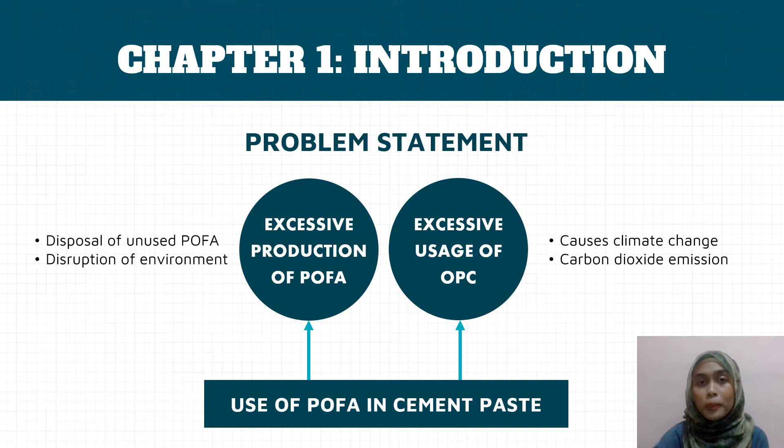In this research, there are 3 objectives that have been focused on, which are to establish the properties of fresh cement paste due to the partial replacement of OPC by POFA. Secondly, to determine the compressive strength of cement paste incorporating various percentages of POFA as partial replacement of OPC, and thirdly, to analyze the water absorption properties of cement paste with OPC replaced by POFA.

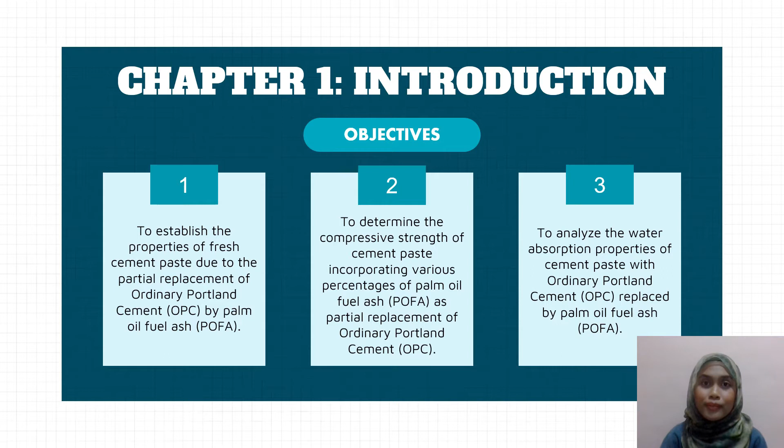POFA is a waste that has been generated from palm oil production. Also, POFA can be recycled and it can be used as partial replacement of OPC. This is because POFA contains pozzolanic materials as it has a fine structure and it contains silica or alumina.

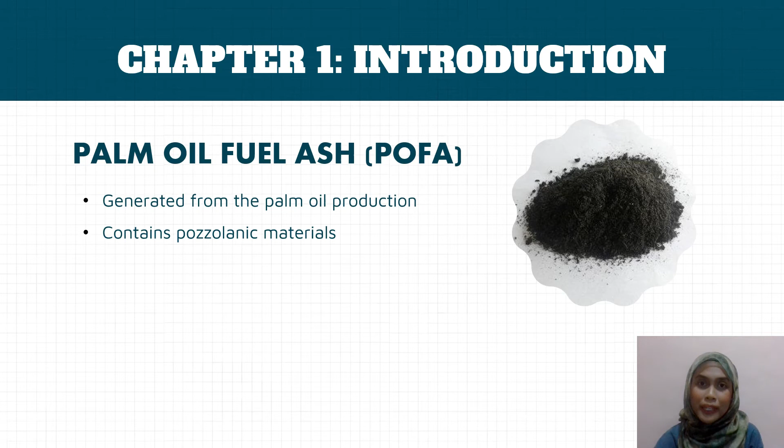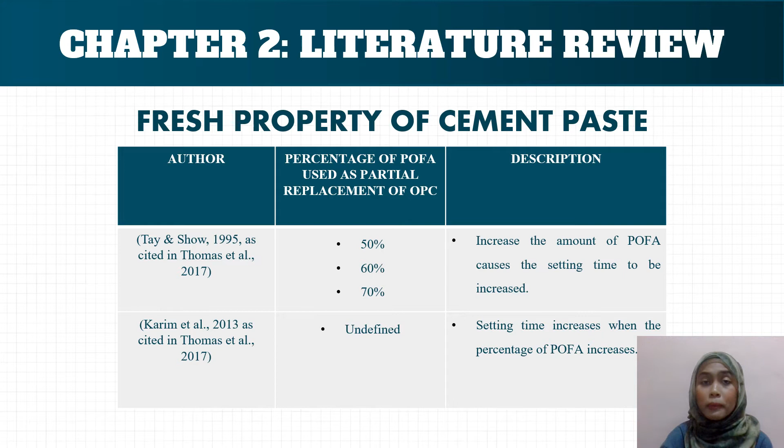Moving on to the next chapter, which is the literature review. For the fresh property of cement paste, these 2 authors have concluded that the setting time will be increased as the percentage of POFA increases. Next, for the hardened property of cement paste, these 2 authors have reported that the compressive strength will be reduced as the percentage of POFA added into the mixture increases.

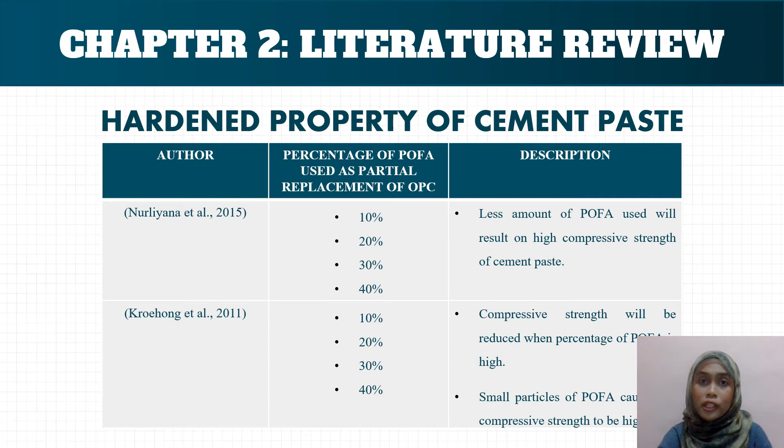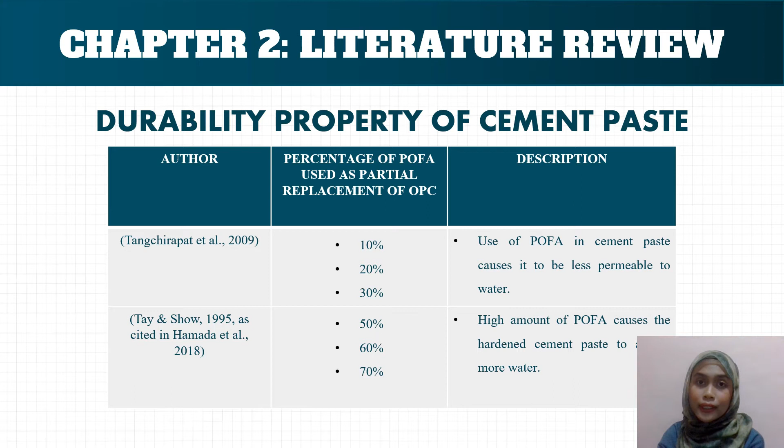Lastly, for the durability property of cement paste, these 2 authors have mentioned that the usage of POFA in a cement paste mixture will cause the cement paste to be less permeable to water. Chapter 3 explains the methodology used in this research.

There are 4 types of cement paste that have different percentages of POFA, which are 0, 5, 15, and 25% of POFA. The cement paste that has 0% of POFA is considered as the conventional cement paste, while the remaining cement paste is considered as improvised cement paste. There are 3 materials needed to produce the cement paste, which are the cement, OPC, POFA, and also water.

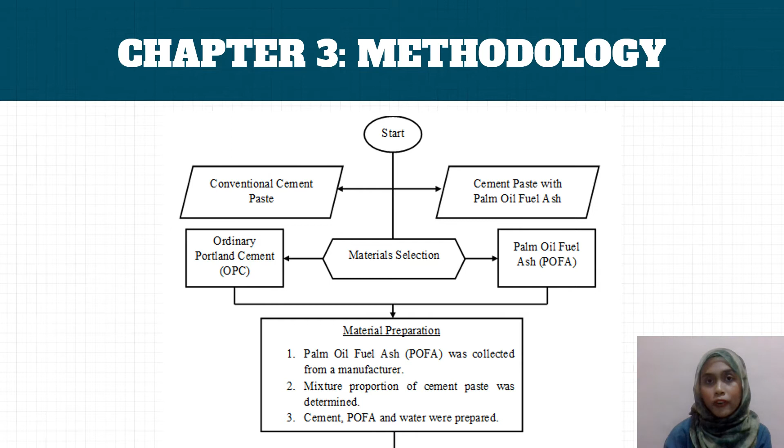The mixture proportion of cement paste was determined according to the correlation of water to cement ratio, and the water to cement ratio used in this project is 0.5. And then the materials were weighed according to the weight that has been calculated from the mix design. Next, all materials were mixed by using the mortar mixing machine, and then the fresh cement paste will be tested on its workability by conducting setting time tests.

Setting time consists of 2, which are the initial setting time and final setting time. Initial setting time is the time taken for the cement paste to start to harden. Meanwhile, the final setting time is defined as the time taken when the needle failed to penetrate the surface of the cement paste. After that, the fresh cement paste was put into the water curing tank for the curing process. The water curing method is used to help retain the moisture in the hardened cement paste for development of compressive strength of the cement paste.

When the cement paste has hardened, there were 2 tests that have been conducted, which are the compression test and water absorption test. Both tests were conducted at 7, 14, and 28 days of curing. The compression test was conducted by using the digital compression testing machine, and it was conducted at 3 different ages of curing to observe the development of compressive strength of the cement paste.

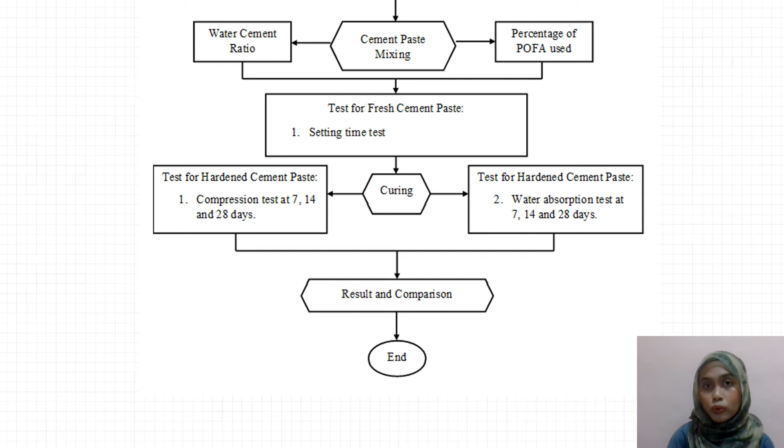And for the water absorption test, the samples were taken out from the water curing tank and put into the oven for the oven drying process 2 days before the test was conducted. After it is oven dried, the weight of the sample will be recorded. Also, after oven drying, the sample will be immersed in water for 30 minutes, and then the weight will be recorded too. The percentage of water absorption will be calculated through those two weights of the sample.

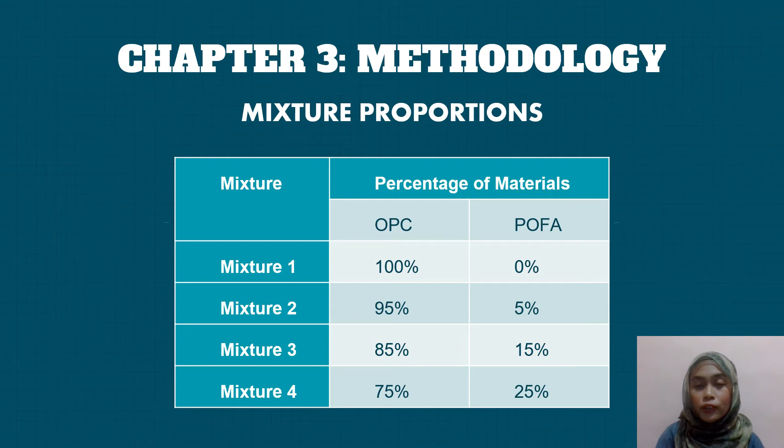The table shown in the slides is the mixture proportions that have been calculated through the correlation of water to cement ratio. Moving on to the next chapter, which is chapter 4, analysis of data.

To observe the property of cement paste, setting time test has been conducted, and from the test that has been conducted, it is proven that the initial and final setting time increase as the percentage of POFA added into the mixture increases. Also, initial and final setting time will affect the workability of the fresh cement paste.

This means that when the initial and final setting time is longer, it increases the workability of the fresh cement paste. This will slow down the process of hydration of the cement paste, and it will take longer for the cement paste to set, and this will ease the working process of cement paste in the construction.

However, from the graph, it can be seen that there was a sudden increment of the initial and final setting time when 5% of POFA is added into the mixture, and this may happen due to the inconsistency of the size of POFA particles in each mix.

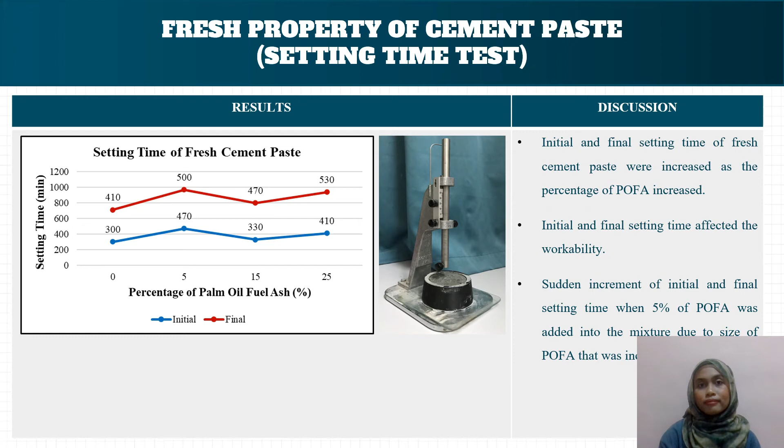Next, to determine the hardened property of cement paste, compression test was done. From the result shown in the slides, it can be seen that the conventional cement paste has achieved a higher compressive strength as compared to the improvised cement paste. The strength of the cement paste will be decreased due to several factors such as the improper transfer process of fresh cement paste from the mixing bowl to the mold, and the improper mixing of fresh cement paste.

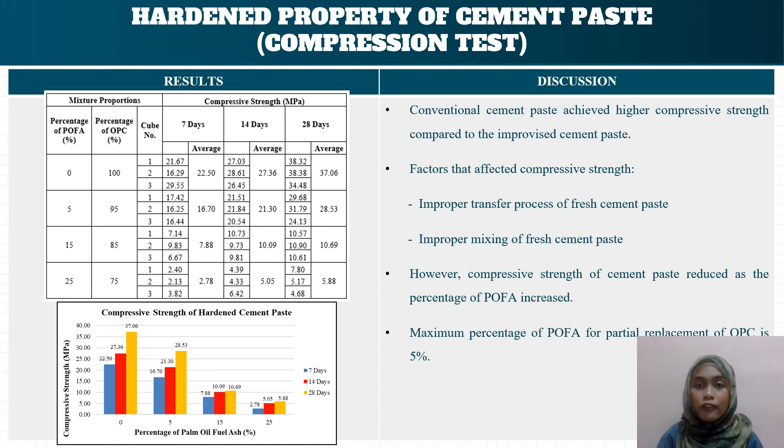These factors will cause the components of materials of cement paste to be isolated from each other, therefore it decreases the compressive strength. However, by comparing the compressive strength of the improvised binder, it is found that the compressive strength will be reduced as the percentage of POFA increases. Therefore, it can be concluded that the maximum percentage of POFA for partial replacement of OPC is only 5%.

Lastly, to analyze the durability property of cement paste, water absorption test was performed. From the result shown in the slides, it can be seen that conventional cement paste has the least percentage of water absorption as compared to the other improvised cement paste. However, by comparing only among the improvised cement paste, the percentage of water absorption will be increased as the percentage of POFA added into the mixture increased.

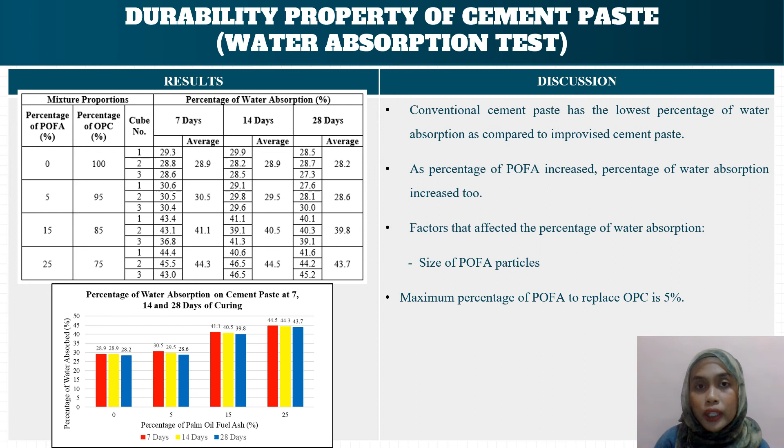The percentage of water absorption may be affected due to the size of POFA particles. This is because fine particles of POFA will have very less porosity, and it absorbs less water into the hardened cement paste. And to conclude, the maximum percentage of POFA to replace OPC is only 5%.

Moving on to the last chapter, which is the summary of work. In conclusion, all objectives have been achieved. The first objective is to observe the fresh property of cement paste by conducting setting time tests. It is concluded that the workability of fresh cement paste is highly dependent on the initial and final setting time of the fresh cement paste. As the POFA added into the mixture increases, the initial and final setting time will be increased too.

The second objective of this project is to determine the hardened property of cement paste by conducting the compression test. Compression test was conducted at 3 different ages of curing, mainly to observe the development of compressive strength of the hardened cement paste. Also, it is found that the compressive strength will be reduced as the percentage of POFA increases. This is because when the percentage of POFA is high, the amount of CaO content in OPC will be low, and it slows down the process of hydration, therefore it reduces the compressive strength of the cement paste. Lastly, to conclude, the optimum percentage of POFA added into the cement paste mixture is only 5%.

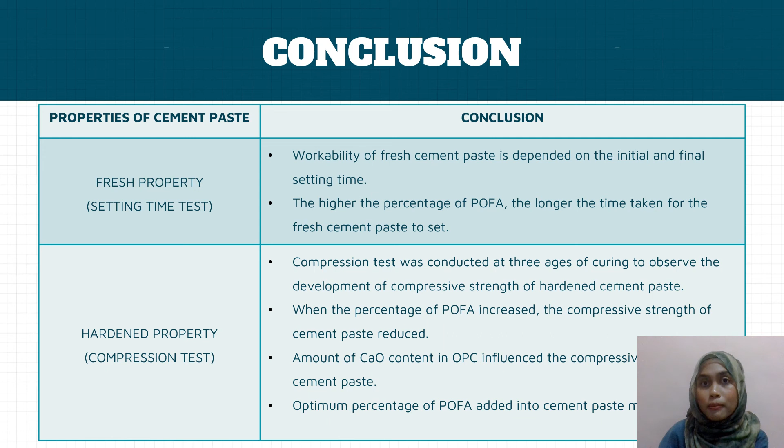And the third objective is to analyze the durability property of cement paste by conducting water absorption tests. It can be concluded that the percentage of POFA used as partial replacement of OPC has affected the percentage of water absorption. This is because the percentage of water absorption will be increased when the percentage of POFA increases.

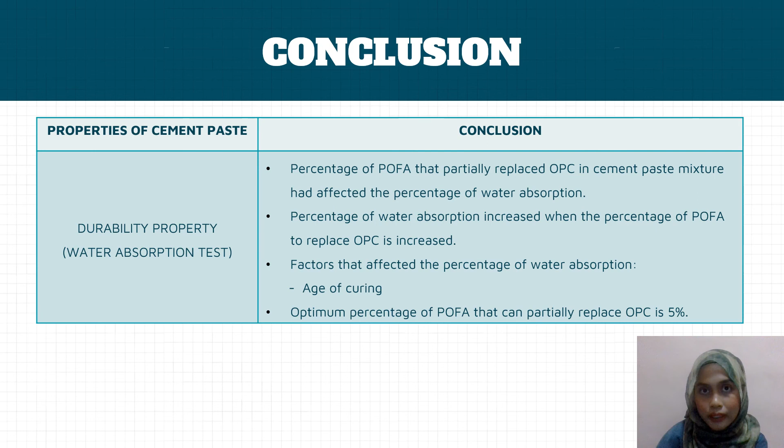The percentage of water absorption has been affected by the age of curing. As the age of curing increases, the percentage of water absorption decreases. This is because as days pass by, the voids and the porosity of the hardened cement paste have been reduced, thus less water to be absorbed by the hardened cement paste. To conclude, the optimum percentage of POFA that can partially replace the OPC is only 5%.

Also, there were some limitations that occurred while performing the test in this research. The first limitation was when the cement paste with 0% of POFA produced the most durable cement paste as compared to the other improvised cement paste. However, in future research, the same size of particles of OPC and POFA should be used, as the particle size affects the porosity of the hardened cement paste.

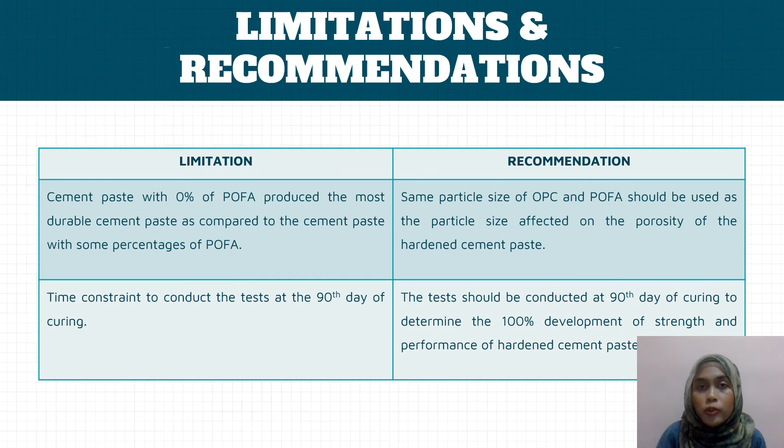The second limitation is the time constraint to conduct the test at the 90th day of curing. So, in future research, it is recommended to do the test at the 90th day of curing to determine the full development of strength and the performance of the hardened cement paste. And that's the end of my presentation.